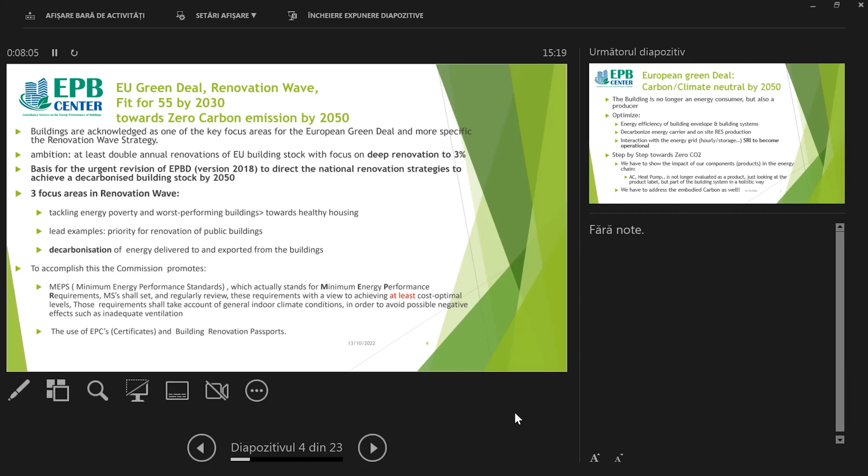Push once, and that's... Can you change the slides? So I say next. I think that works better.

About the Green Deal and climate neutral by 2050. We know, of course, the building is not just an energy consumer, but also a producer. So we have to optimize the building systems and envelope, decarbonize the energy carrier, on-site renewable energy production, and interaction with the grid, which is essential. It means that we need an hourly approach. We need to consider storage, and the smart readiness indicator becomes more operational. It will be step by step towards zero carbon.

Carbon, of course, CO2, as said before, is carbon equivalent. We have to show the impact of our components in the energy chain. You don't evaluate the product as such, but as a part of the system in a holistic way. And in the near future, we have to address embodied carbon as well, as Francis Allard already explained how France is doing it. Next slide.

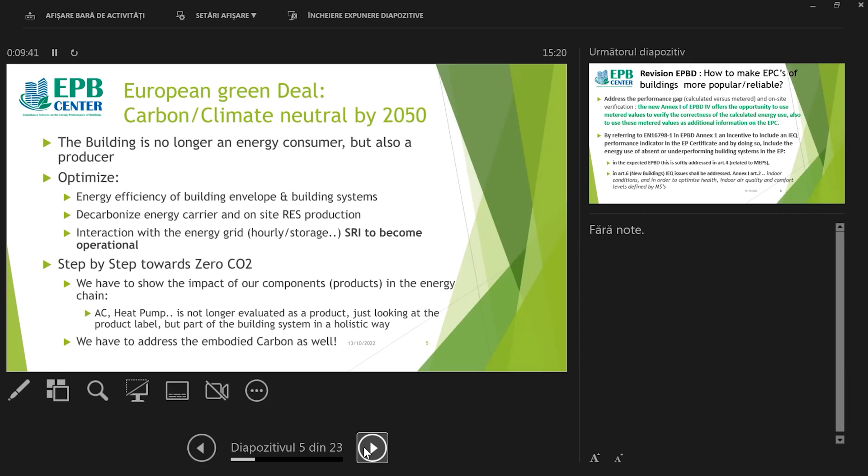One of the reasons of the revision is to make the energy certificate more popular and more reliable. And that will also be addressed in the presentations of tomorrow on the CERT program. We have a performance gap, so there is always discussion about the metered values compared with the calculated one.

In the current Annex 1 proposal, it is also giving an opportunity to use metered value to verify the correctness of the calculated use, but also to use it as an additional value that you can give on the energy certificate. Some countries do this already, but it is not done by all countries in Europe.

And by referring to the Indoor Environmental Quality Standard 16798 in the annex of the EPBD, there is an incentive to include indoor environmental quality performance indicators on the certificate. And by doing so, include also the energy use of absent or underperforming building systems in the energy performance calculation. So you get some negative values when you don't perform.

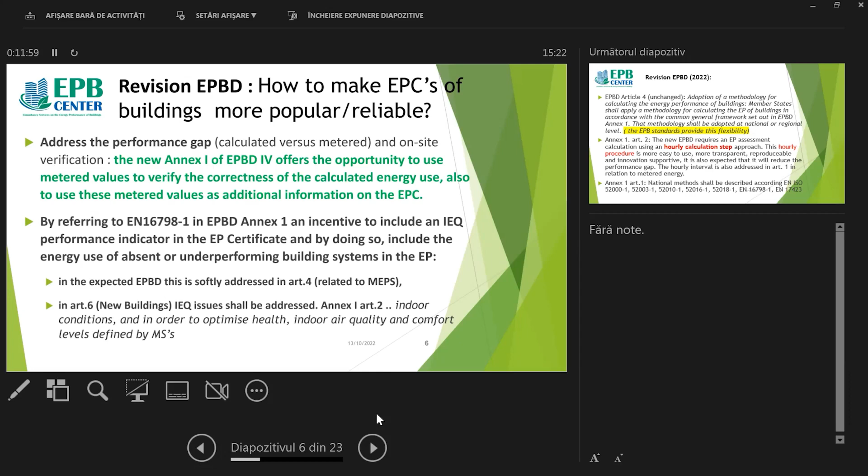Article 4 is unchanged, so it is still the fact that the EPBD or the methodology refers to the EPB standards. In Annex 1, Article 2, the new EPBD requires a calculation using an hourly calculation step approach. I've seen in this ongoing discussion that the member states again wanted to add "monthly", and I will explain later that this is quite stupid.

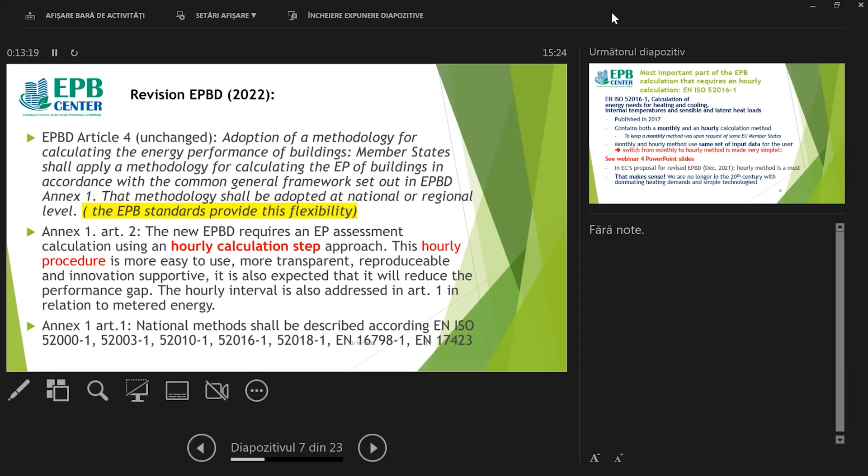And this hourly procedure is, as I see, more easy to use, more transparent, reproducible, innovation supportive. It is also expected that it will reduce the performance gap. And it is also referred to in relation to metered energy. And also the Annex 1 refers to the overarching standards, and they added 2 other standards, the Indoor Environmental Quality Standard and the standard on primary energy factors and CO2 emission. Next slide.

Most important is the calculation, of course, of the energy needs, and that is reflected in the ISO 52016, published in 2017. It contains at this moment both monthly and hourly calculation methods. We kept hourly and monthly in it because several member states want to use it. I hope that will change. But what is essential is that both methods, hourly or monthly, use the same set of input data for the user. So switching from monthly to hourly is actually quite simple. The calculation tool has to handle it, but for the user, there is no difference.

We also made in webinar 4 a presentation on this issue, so you can look at our website. The proposal to make hourly methods a must makes sense. We are no longer in the last century. We should do it. In the next slide, I explain it a little more.

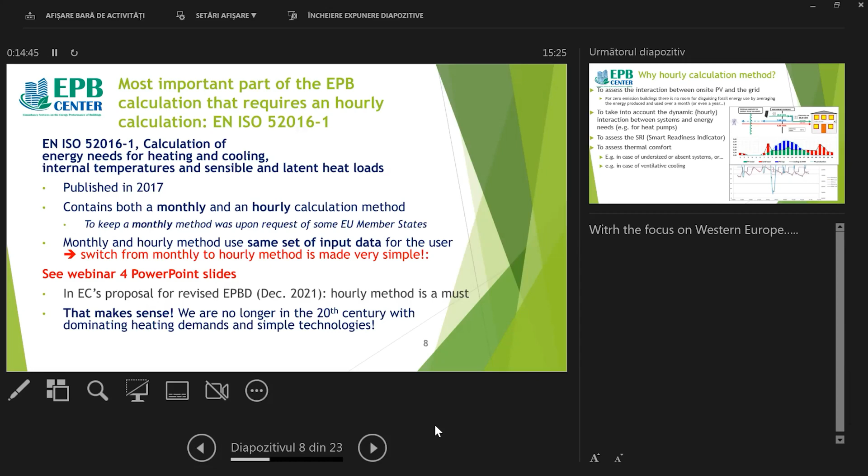To assess interaction between on-site PV and the grid, you need that. For zero emission buildings, there is no room to disguise fossil energy use by averaging the energy produced and used over the months, or some even over the season or a year. To take into account the dynamic hourly interaction between system and energy needs, for example, heat pumps, but there are more examples. To assess the smart readiness indicator and to assess the thermal comfort in case of undersized or absent systems, or in case of ventilative cooling systems. Next slide. I will explain the picture later.

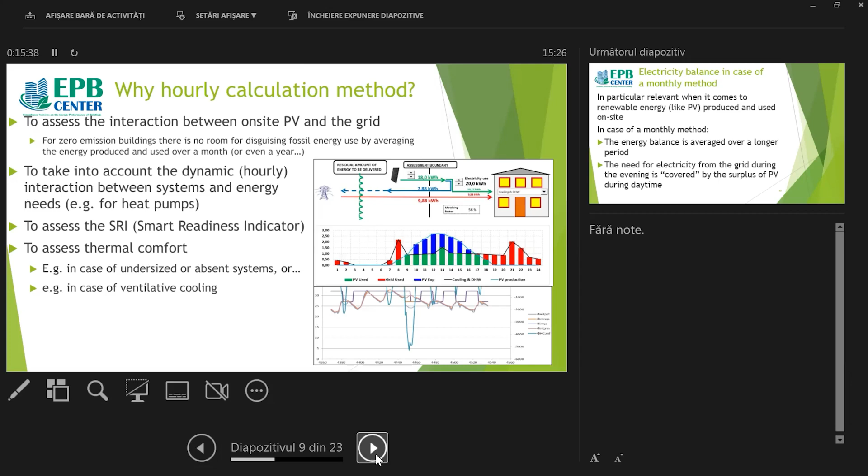In particular, it is relevant when it comes to renewable energy. The electricity balance in case of a monthly method is not working. The energy balance is averaged over a longer period, and the need for electricity from the grid during the evening is covered by surplus during the day, which is of course a theoretical approach. Next slide.

Now, the daytime surplus does not cover nighttime shortage. It is only compensating in the calculation. It is a cover-up, disguises non-renewable energy use, so it leads to fake zero emission buildings. And yes, this could be quasi-solved in a monthly method with a correction factor for the phase difference between supply and demand. But such a factor gives only generic correction, and does not reward the impact of an optimization of the energy balance between building and grid by using smart equipment, batteries, and other storage systems.

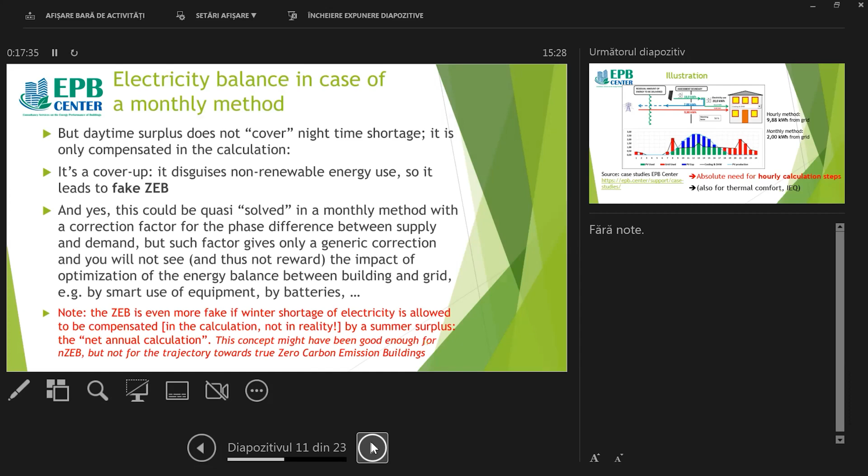Next slide. Here you see a little bit a picture how it works. If you do the calculation for this house with a heat pump, and you do it on basis of an hourly method, you will find that you still need in the nighttime more energy from the grid, 9.8 kilowatt hours. If you use a monthly procedure, you will find that you only need 2 kilowatt hours from the grid. Well, I think it is quite obvious that this is not the way to go forward. And similarly, this is also the case for the thermal comfort calculations. Next slide.

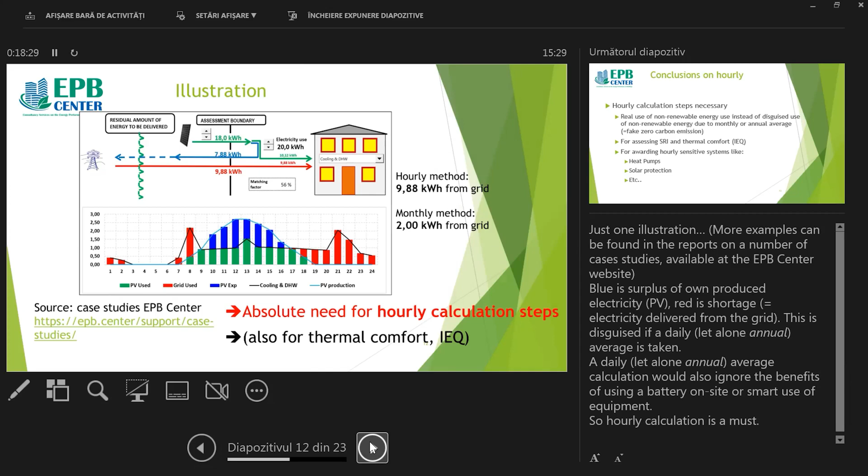So the conclusion on hourly is clear for me. Real use of non-renewable energy, instead of disguised use of non-renewable due to the monthly or even annual averages, is a fake carbon emissions. For assessing the smart readiness indicator and also the thermal comfort, and for awarding hourly sensitive systems like heat pumps, solar protections, and more systems we have in buildings that can be controlled and steered on an hourly basis. Next slide.

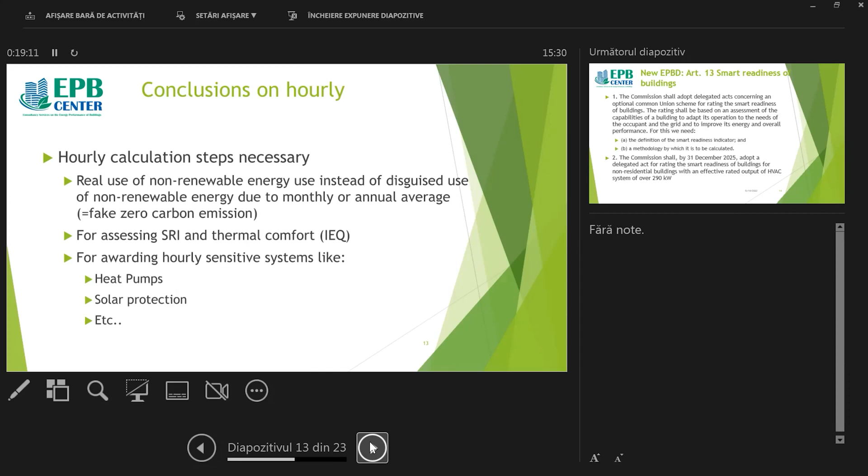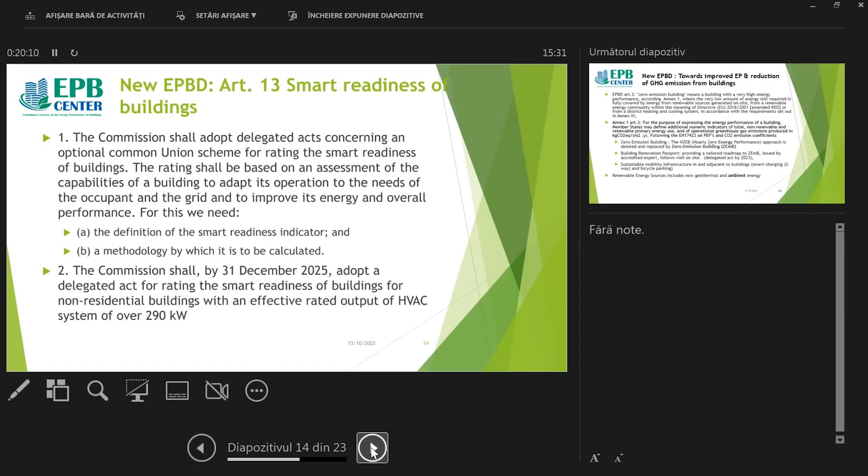On the smart readiness indicator in Article 13, it is said that the Commission shall adopt delegated acts regarding this smart readiness indicator. And the rating shall be based on an assessment of the capability of a building to adapt its operation to the needs of the occupants and the grid interaction. For that, of course, we need a better definition and a methodology. And the Commission says in the directive that they will develop it by December 2025. Adopt a delegated act for rating the smart readiness indicator for non-residential buildings with an effective output of 290 kilowatt. So there it becomes requirement.

Towards the improved greenhouse gas emission reduction in Article 2, it is said that we have to go to really zero carbon buildings, where the little energy that the building still needs has to be covered by renewables produced on site or nearby, or connected to district heating and cooling systems with a decarbonized energy supply. This is the proposal.

And in Article 3 we say that for the purpose of expressing the energy performance of buildings, member states may define also additional numerical indicators like non-renewable and renewable primary energy use, operational greenhouse gas produced in kilograms CO2 equivalents per square meter per year, following also the standard. So the nearly zero energy building of the current EPBD approach will be deleted and replaced by the zero emission building approach.

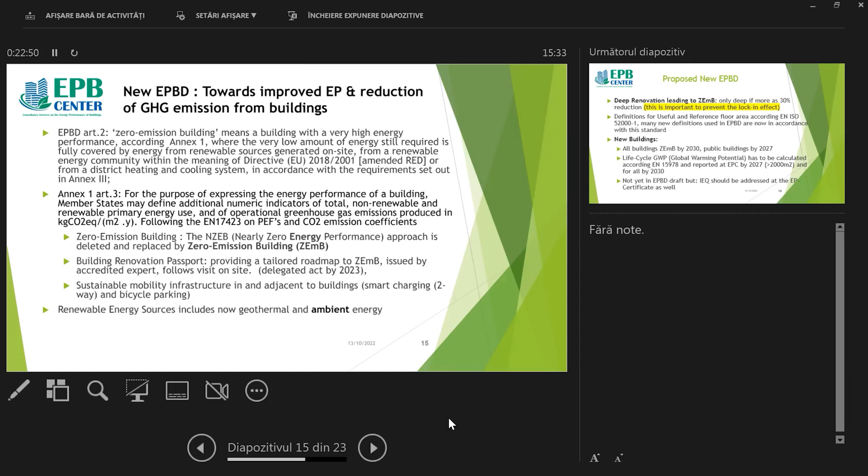I mentioned before deep renovation leading to zero emission buildings. There is a definition that deep is only 30% reduction. Some countries want to have more, but the idea behind this is the lock-in effect, that you don't do just one measure that is very cost effective but doesn't lead to 30%, with the danger that the next measure is too expensive. So that's the idea behind this. Definitions in the EPBD are for, let's say, 95% according to what we already included in the overarching EPB standards.

And for new buildings, there are some requirements. All buildings should be zero emission by 2030. I've seen some comments from some member states that it should be later, but if we want to reach zero carbon in 2050, I don't see why. Public buildings should be earlier, in 27. Life cycle global warming potential has to be calculated and reported by 27 for buildings bigger than 2,000 square meter and for all buildings by 2030. So you see that France is already ahead. Not yet in the EPBD draft, but I think it should be: the indoor environmental quality should be addressed on the certificate as well. That is softly addressed in the current draft, but not there yet. The next slide.

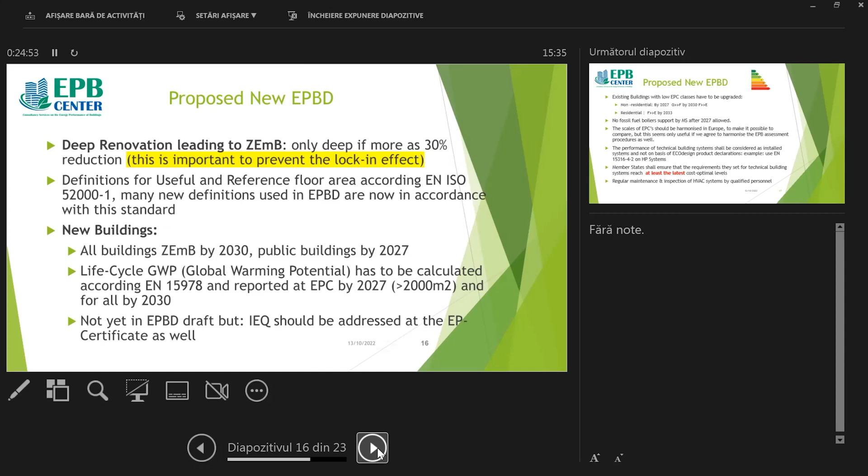The proposed new EPBD has new energy class improvement for non-residential by 2027 from G to F, 2030 from F to E, residential from F to E by 2033. So that gives you a little bit of picture which renovation activities are implied by this. No fossil fuel boilers anymore supported in governmental programs by 27. And the scales of the EPCs, the certificates, should be harmonized in Europe to make it possible to compare. But it seems only useful if we also agree to harmonize the assessment procedures as well.

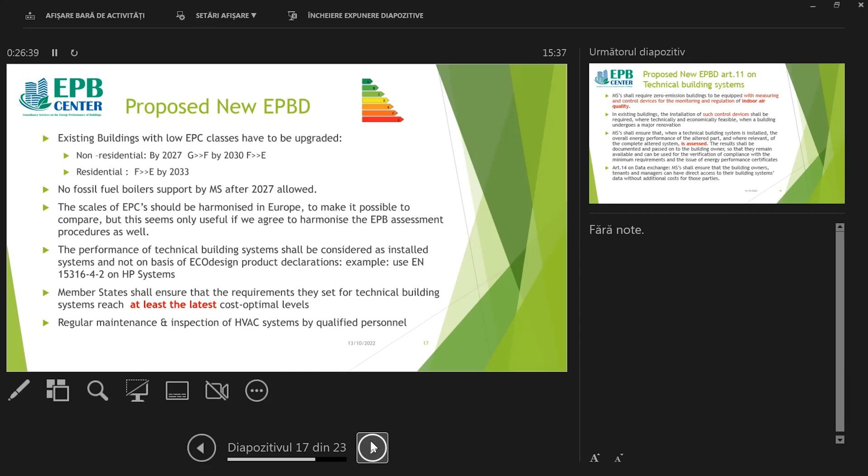The performance of technical building systems shall be considered as installed and not on basis of eco-design product declarations. An example is, of course, to use the EN 15316, that is the heat pump system standard, instead of the eco-design declaration on the COP or the SCOP. Member states shall ensure that requirements they set for technical building systems reach at least the latest cost optimal levels. And regular maintenance and inspection systems by qualified personnel is mentioned also in the new directive. Next slide.

In Article 11, it's said that member states shall require zero emission buildings to be equipped with measuring and control devices for monitoring and regulation of indoor air quality. That is, of course, interesting for our industry. In existing buildings, installation of such control devices shall be required when it is feasible. But for new buildings, it is required.

Member states shall ensure that when the technical building system is installed, the overall performance of the altered system, where relevant, is assessed. And the results should be documented and reported to the building owner.

And important also for the energy advisors and consultants is Article 14, where we say that the data you use to assess the energy performance of a building, and which is the basis for the calculation, shall be freely available for the building owner without additional cost.

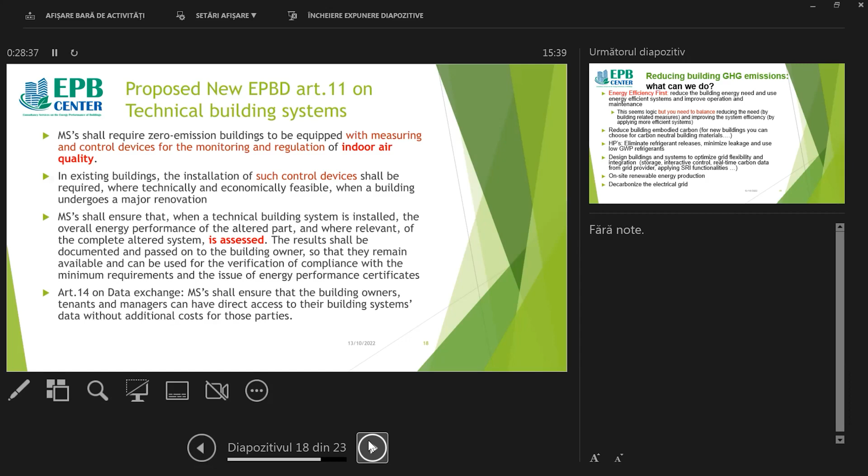So nowadays, what you see in many countries is that they make the energy certificate, but they don't give you the database that was the basis for assessing the certificate. Which means if you go to another company to do perhaps your renovation, he has to do the job again. And that is not very useful for the consumer. Next slide.

Reducing greenhouse gas emission. Well, what can we do? Of course, you have the energy efficiency first principle, but you have to look at it a little bit more logically, because you have to balance the cost between reducing the need by building-related measures and improving the system's efficiency by applying more efficient systems. So how to find the optimum is not per se clear in the beginning. So you really have to balance the different measures.

Reducing the embodied carbon. Well, that's of course for new buildings and deeply renovated buildings. You can choose carbon neutral building materials, but they are of course more expensive. And on heat pumps and air conditioners, we have to eliminate refrigerant releases, minimize leakage, and of course use low global warming potential refrigerants. And on the design of the systems, we have to optimize the grid flexibility and integration.

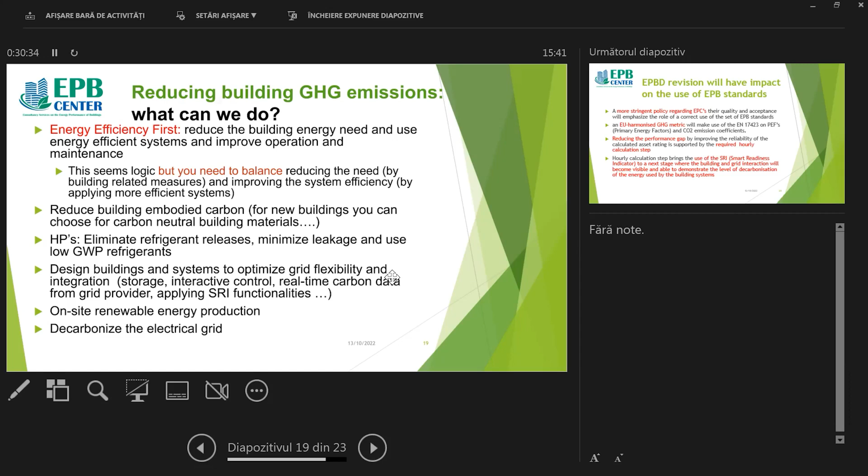Will it impact the use of the standards? Well, if I read the EPBD, a more stringent policy regarding the certificates, their quality and acceptance will emphasize the correct use of the set of energy performance of buildings standards.

The EU harmonized greenhouse gas metric will make the use of the standard on primary energy factors and CO2 emission factors, the 17423, more prominent, and reducing the performance gap by improving the reliability of the calculation is supported by the required, I hope so, hourly calculation standard. And the hourly calculation standard brings, of course, also the smart readiness indicator to a next stage. Next slide.

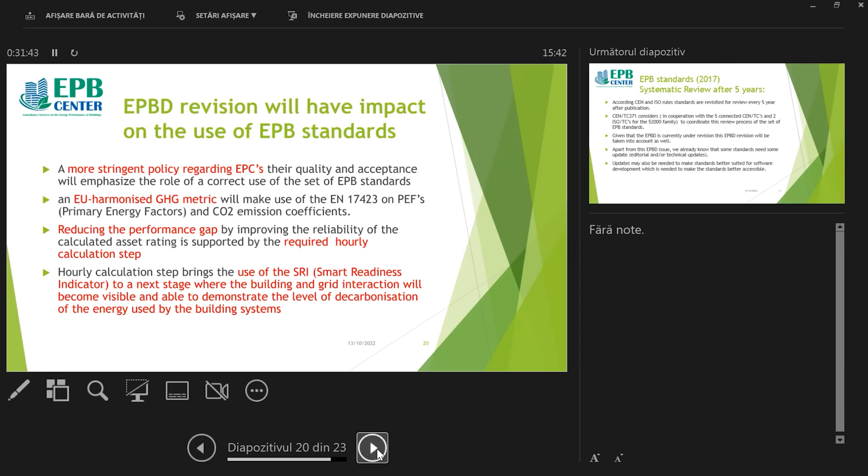How do we look at the current revision? Well, we have to revise anyhow because after 5 years, we published in 2017, we have to reconsider if the standards are still up to date according to the CEN and ISO rules. In my committee TC371, we consider in cooperation with the other 5 TCs and the 2 ISO/TCs for the 52000 family to coordinate this review process that is ongoing at this moment.

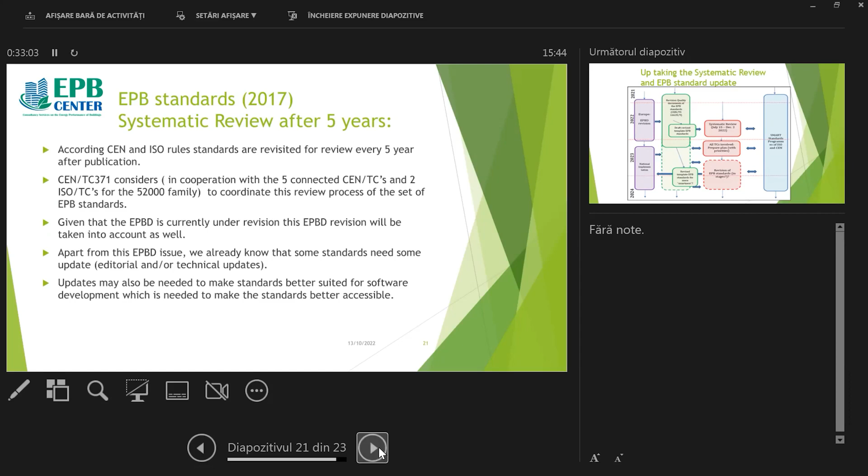And given the EPBD revision, we will take in the revision that will start after the publication of the EPBD this revised text as well. And apart from this EPBD issue, we already know that some standards need some update, editorial but also technical, and updates may also be needed to make standards better suited for software development, which is needed to make the standards more accessible. The next slide, I show you a little bit the process where we are.

So you see the EPBD revision in 2022. Well, it will be published in the beginning of 2023, where the national implementation of EPBD will take at least 2 years, 1.5 years, depends a little bit. And we expect that in the beginning of 2023, we can start this revision process. For that process, of course, I will ask the Commission for support also.

And this systematic review is ongoing at this moment. It should be finished by the beginning of December. And all the TCs have to prepare a plan with priorities on the revision of different standards. Then the EPB standards will be revised in stages.

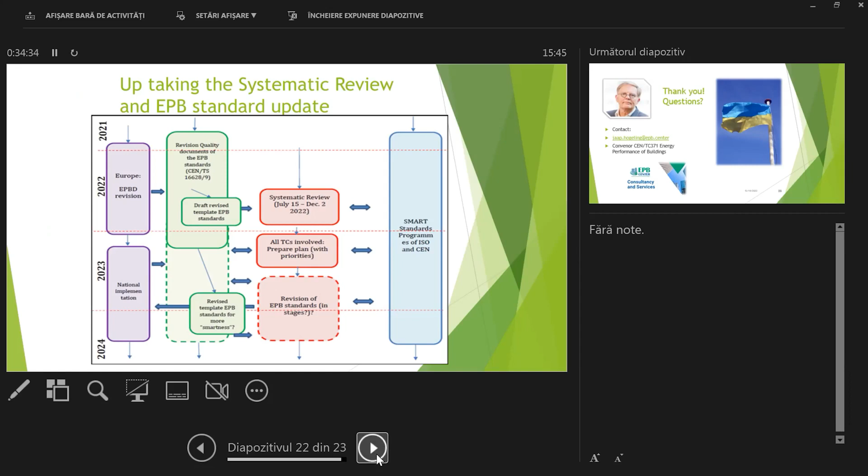In this process, we also look to a program in CEN and ISO on smart standards. So the standards are not this paper document, but also, you could say, machine readable and connected to calculation procedures. I think the next slide will say that this is the end.